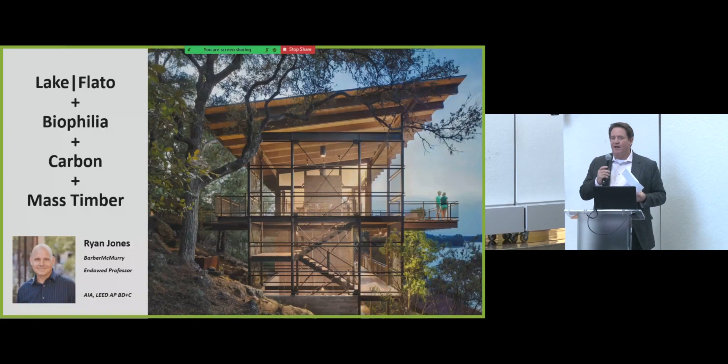Thanks, Jason. Appreciate it. I want to take a moment, and just for the students out there, I want you all to realize how unique it is to have an endowment like the BarberMcMurry endowment within your school. I work all across the country with a lot of different schools, and it's very unique to have an endowment that large that's allowed this school to bring people like me and the amazing other architects that Jason mentioned to the school.

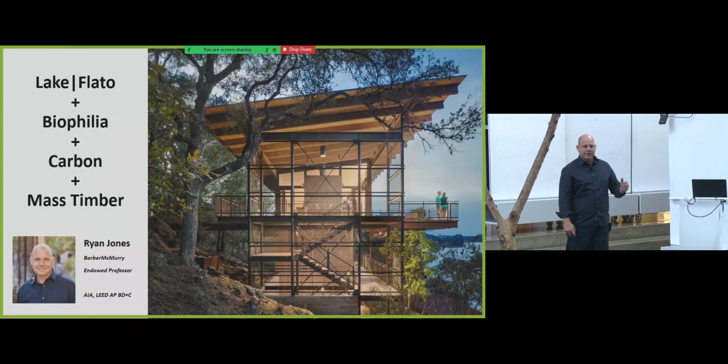As Jason mentioned, I've been with Lake Flato now 18 years, and I lead our higher education studio. Today Jason was asking me, what's the title of your lecture? I got really creative, and I said, well, my title's my agenda.

So what we're going to talk about today is I want to show a lot of work, a lot of imagery, but I want to talk specifically about how we arrive at this work in a very deliberate way, through an integrated design process. So we're going to show some beautiful imagery, talk about biophilia, carbon, and the kind of mass timber direction we're going as an office.

Lake Flato is a firm of 150 people. We have 2 offices, one in Austin, one in San Antonio. We're very Texas-based, but we work all over the country.

We got our start working on ranch houses, and this is 38 years ago, and I think it's always good to remind everybody this is the middle of the postmodernism era, and David and Ted come in, and they're really focused on vernacular architecture that's rooted in place and connected to climate.

We always like to differentiate the fact that we work on ranch houses at the very beginning, because ranch houses to us are differentiated from just normal residential in the fact that they need to be resilient. They need to be out. They're out in the land. They're not urban environments. They're responding to landscape and responding to the breezes and engaging topography, using natural materials of the land.

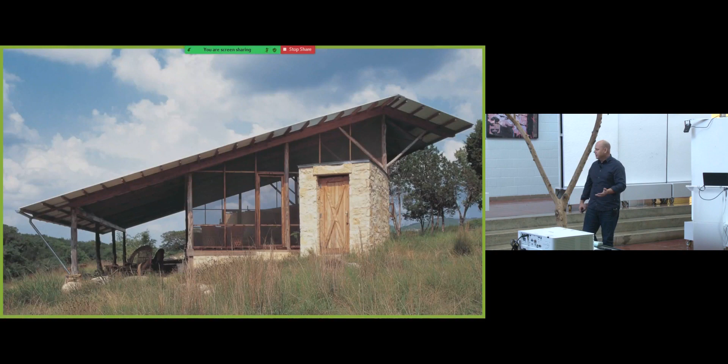Protecting ourselves from the northern breezes, kind of receiving the southern breezes off the creek bed, and those kind of elements, and creating outdoor environments that don't require energy, that just use the natural resources of the climate and the earth to provide shelter.

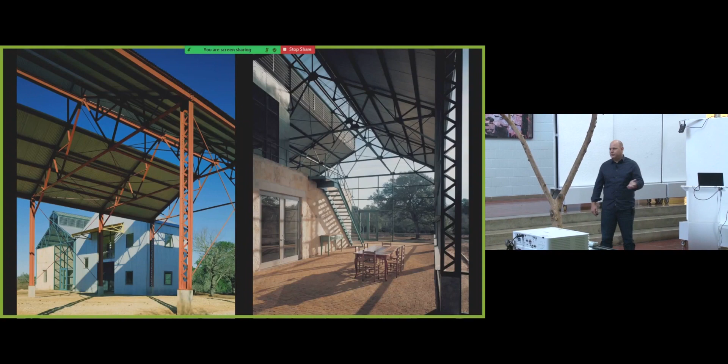And at the same time also, transforming things that are remnants, in this case, an old cement plant into a new residential compound. This is kind of the root of our work, transformation and connectivity to landscape.

I think it's really important to start there because it's really part of our ethos and who we are. As Jason was mentioning, no matter if we're working on residential work or a 250,000 square foot lab building, we share the same values across all of our work. We are highly dedicated to the craftsmanship of architecture, deeply involved in placemaking and the role that has in creating delight and beauty within architecture.

We are very data driven. We use performance as not just something that we hope to attain through our engineers, but we lead through data, the pursuit of data to inform our decision process. And ultimately, at the end of the day, we as architects, our greatest goal is to build community within and play a role in the building of community and culture.

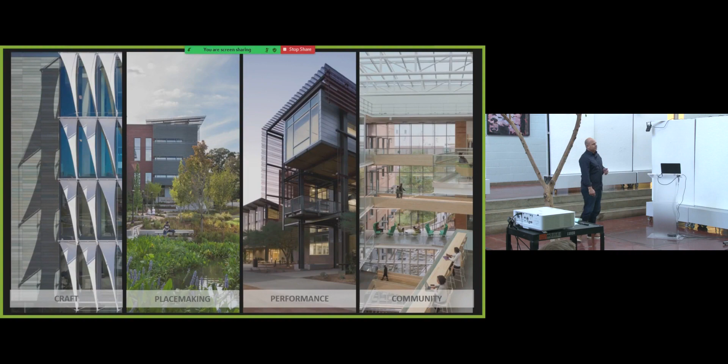So as I mentioned, we're working all over the country now. We're able, because we have such a value system that allows us to focus on the unique attributes of every unique place. What I like to always say is that we as architects travel, but our buildings don't travel. And so our buildings always feel of their place.

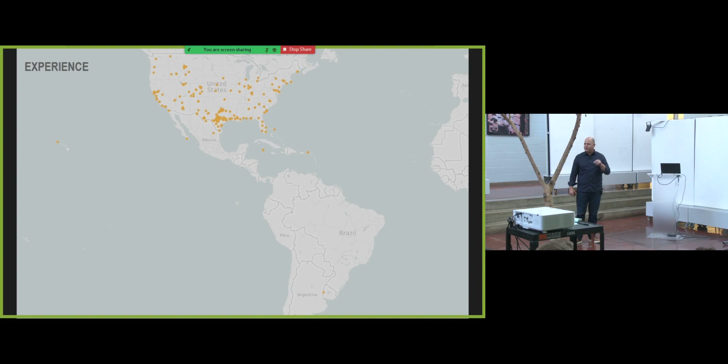And because we aren't necessarily a form-based firm or these kind of things, we really focus deeply on understanding that whenever we're working in Philadelphia, that project is very different than it is in Arizona. And I hope you see some of that today.

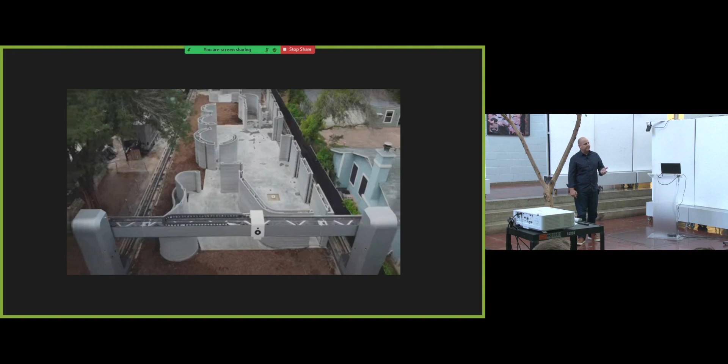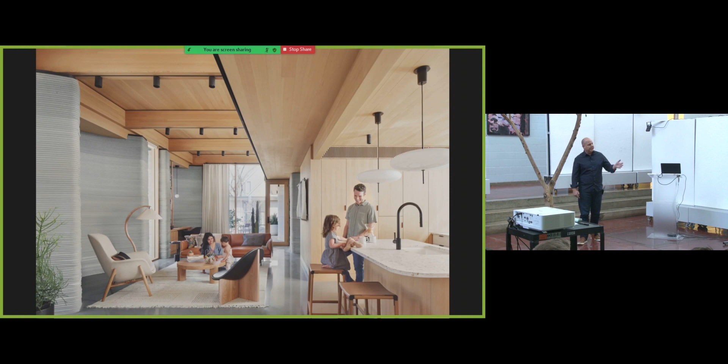So we got our foundation in these ranch houses, but we're also doing very innovative kinds of houses today when we focus on craft, technology as a form of craft. This is a 3D printed house that we just wrapped up last year, really studying a new form of construction and leveraging the system to create texture and a new sense of environment for residential construction.

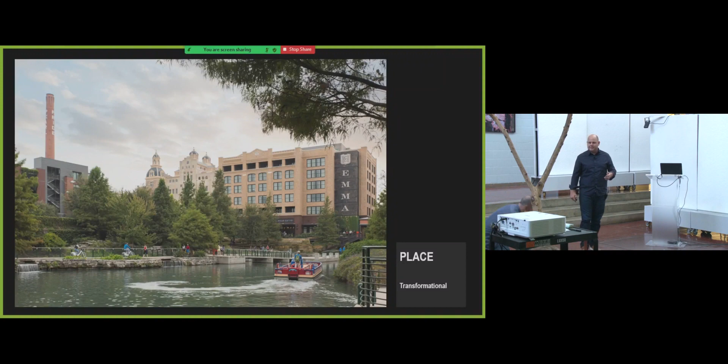Whenever I talk about place, it's also transformation. This was actually my very first project at Lake Flato 18 years ago, where we transformed a storm swale connected to the San Antonio River into a new kind of civic place for the city. Thanks to the endowment, my students were able to visit a couple of these places, including this one, a couple of weeks ago, creating new central places for people to come together.

But place isn't limited to just landscape. It's also a matter of delight, like I talked about earlier. Delight is a little bit different in that the way we talk about it is it's almost a surprise - something you don't expect, but it resonates with you at a different level.

And then we believe that architecture can magnetize space. It can bring people together just through the quality of space that's provided and the complexity of space.

Ultimately it's also unique to its particular place and authentic. We talk a lot about authenticity when it comes to working in different environments because we don't want buildings to feel out of place. In fact, we talk a lot about how our most successful buildings feel inevitable - so deeply rooted in place that once they're built, they almost feel like they've always existed, and you can't imagine what it was like before. I think our most successful buildings achieve that.

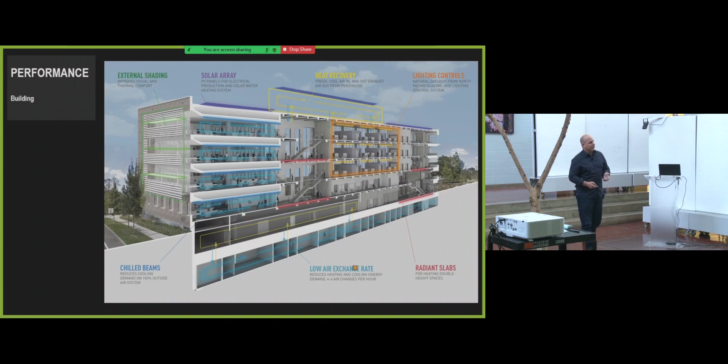As I mentioned, performance - when it comes to building performance, understanding the complexity of systems. I hope part of what you get out of today is understanding the complexity of architecture and the need for an integrated approach, leveraging a lot of different expertise to execute buildings. In this case, a 250,000 square foot lab building required a lot of different systems to achieve 56% energy reduction as a whole, and yet still maintain beauty, still accomplish contextualism and modernism at the same time.

But we don't just focus on energy and carbon, we also focus on human performance and the sense that the type of spaces we provide elevates the human experience and success, frankly, in people's work.

So all this, as we've focused over the last 5-10 years, represents our physical connection to nature, which is called biophilia - I hope you're familiar with that term. If not, I'd suggest you do some research on it. Basically it implies that our genetics and our psychological understanding of space is driven very much, all the way back to the savannah, by our understanding of living in nature and being threatened all the time by nature.

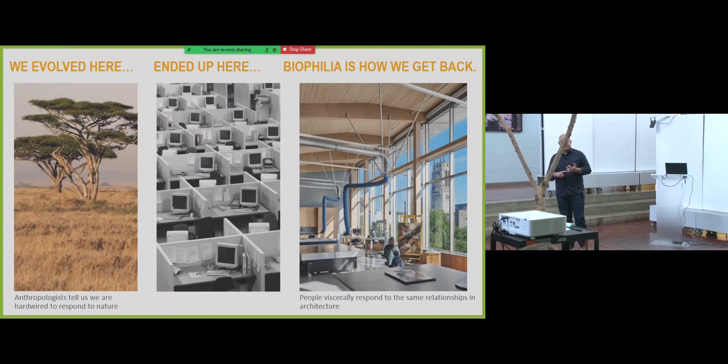But it also creates a strong connection to our natural environment. Over time, as we've built architecture and other things, we've kind of landed in a place of cubicles, especially several years ago, where we're stuck in these really awful, inhumane environments. Biophilia in our lens is really a way of getting back to what feels more natural, what makes us happy, what makes us most productive, and just connected to nature in general. That's a huge part of our ethos as an office.

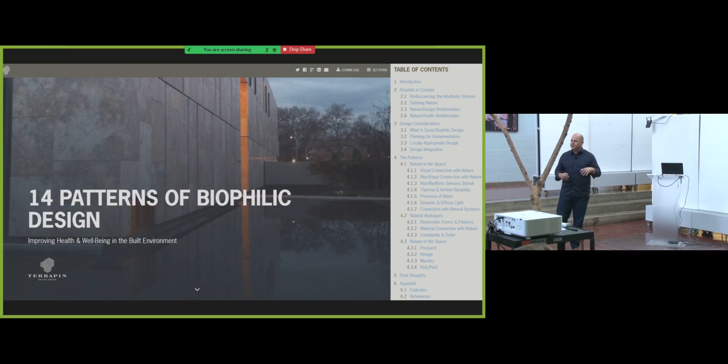The very first step to understanding biophilia is to go and reference the 14 patterns of biophilic design that Terrapin Bright Green has done for all of us. It's a great resource - if you're not familiar with it, you should go read this. This to me is mandatory reading for everybody working in architecture. It basically talks about all the different forms and different ways that design can connect us to nature.

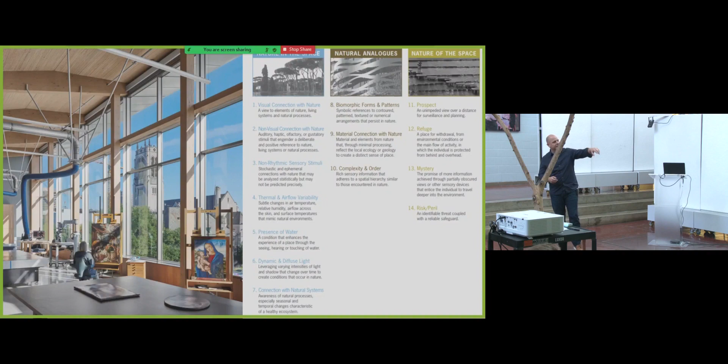We always look through our projects through the lens of nature in the space and natural analogs. I don't have time to give a whole lecture on this, but I'd encourage you to go read about it.

It's all about taking spaces like this that we've been stuck with over several years. As a higher ed person, I can't tell you how many classrooms I go into across the country that look exactly like this. We look for opportunities to reconnect them, and even though this isn't an amazingly expensive space, you can tell the connectivity it brings back to nature as a whole.

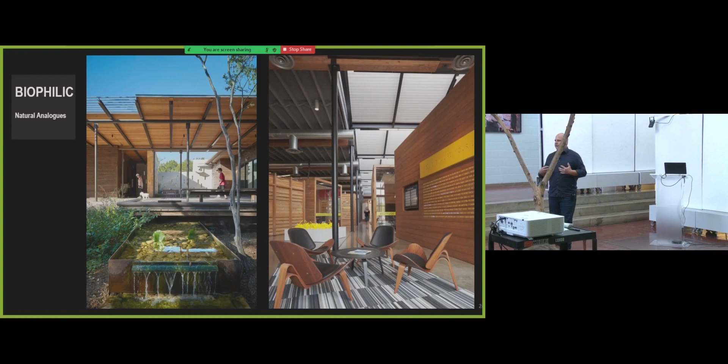There's also using natural materials, water, engaging porches that connect to the landscape, daylight, all the stuff your professors talk about over the years, the way it shapes space. We talk about buildings being shaped by light and by landscape, meaning it's a major driver of where we put program, how we shape roofs, and everything. You can feel that in all of our work.

At every level, I think that comes from realizing—and a professor once told me this—that the older I get, the more I realize how little I know. The point is you have to lean on the expertise of other people to achieve really high aspirations for your architecture.

So we focus very heavily on bringing together diverse groups of people very early on in the process, including our clients, our engineers, landscape architects. Some of our best ideas come from people outside of the project, other faculty, and we bring them together to talk about the project in a cohesive manner, very early on.

We do that through the lens of talking about things like ecology and water, energy and air, light, materiality, resiliency, equity, diversity, and inclusion. We run charrettes geared around these topics and think about the project through the lens of those issues.

There's an extensive process we go through in documenting this, but the point is that we're always looking to gather information—gather opinions, gather data, gather different perspectives, and in some cases even history.

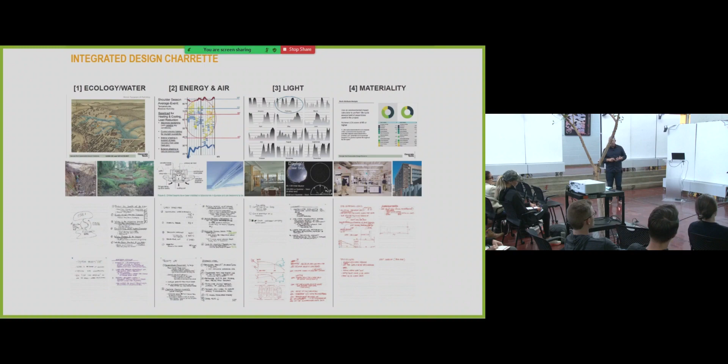Through this integrated process, my students have seen that we try to define what the goals and aspirations for the project are at the very beginning. We do that through what we call SMART goals—goals that are specific, measurable, aspirational, attainable, relevant, and timely.

The point is they're not just 'we want to build a beautiful building'—they're very specific about what we're trying to accomplish and how we define success. Because the clarity of your goals really matters, and you need that clarity in order to build consensus and belief in your project amongst a large group of constituents.

Most of the time in your career, unless you're working in residential, you're not dealing with just one person—you're trying to keep 20, 30, 100 people happy, and it's very difficult. The way you do that is by developing buy-in through a very clear, aspirational understanding of what you're trying to accomplish.

Then on top of that, you keep track of those goals throughout the lifetime of the project so they don't just die at conceptual design. You go back and check on them through SD, DD, CDs, all the way through. You always return to these goals established early on, which is why this process is key—because your ability to impact your project fades with every day that goes by.

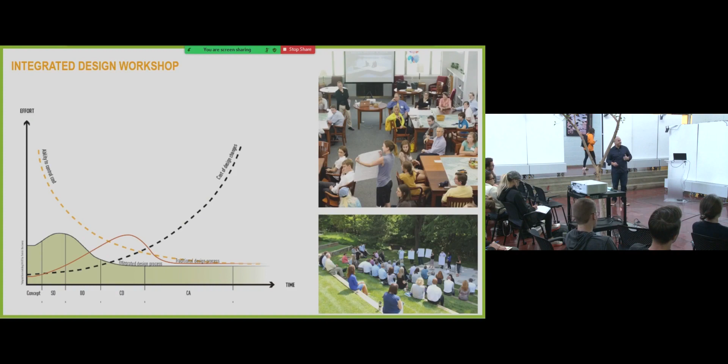So I want to encourage you to be very aware of the need for collaboration and an integrated approach in architecture as you move into the profession. I think it's our focus on this deeply integrated design process that integrates both beauty, what we call the art and science of architecture, at the very first stages that makes us one of the more successful, sustainable design firms in the country, with 14 AIA Top 10 awards, which we consider the highest honor within our profession. And we've managed to do that across a lot of different sectors.

So I thought I'd quickly go over a project that summarizes this impact of integrated design. It's Confluence Park, an outdoor pavilion we designed at the confluence of two waterways in San Antonio. The original design was this conceptual idea of just a shell. It's very form-based, interesting, it's been done a hundred times, but it's interesting, a fun space to be under.

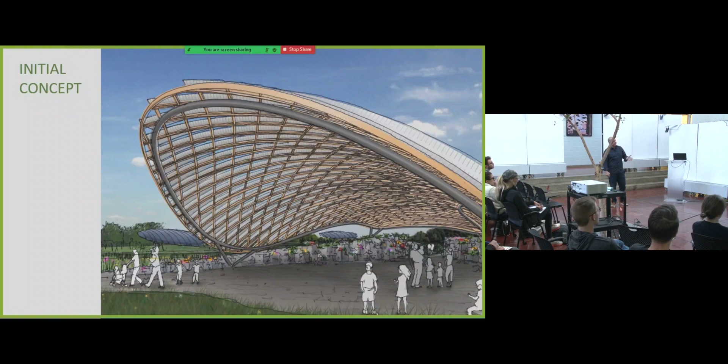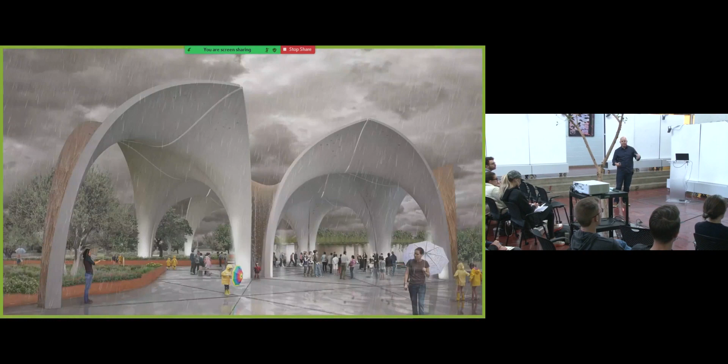What we found is, as we started thinking about it with our artists and engineers, what we're really trying to do is protect people from water. We're also trying to collect water, and understand the shape of that and how it could form a building that would function in both ways at the same time, being a physical representation of the collection and movement of water.

So we worked with artists and structural engineers to understand how we would fabricate what we call the petals to accomplish this. Each one of these petals is the exact same, but they're distributed in a way that creates an interesting biophilic form that's educational about the waterway, constantly collecting water and so on.

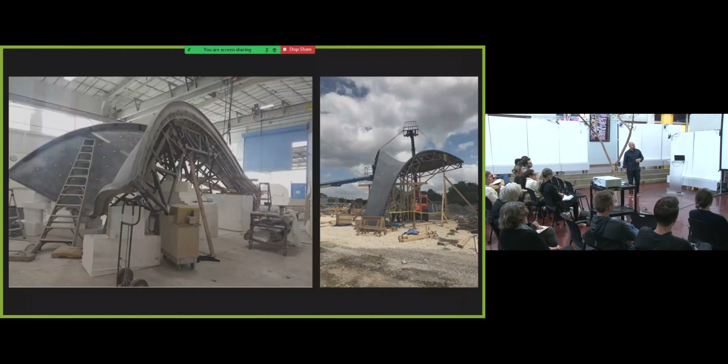Even though it's shaped like petals and runs along the waterway, it's really also a ceremonial destination. That's only accomplished if you have a good technical understanding of concrete and form-making, and all the other skill sets required to execute a project of this order of magnitude, as well as constructability.

These were all cast from a mold that was fabricated in Austin. This is actually a temporary setup, a mock-up, and they were cast in Austin, shipped to San Antonio, and placed in place, all hung. It was all erected in just a couple of days.

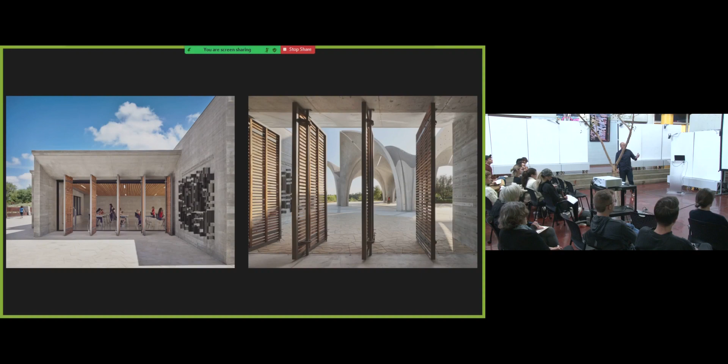So some of it's just beautiful imagery, and we'll share some of that today. But almost all of our work at EcoCon, our ecological conservation studio, is really focused on education. So all these moments are opportunities to be demonstrative and celebrate the unique role architecture can play in connecting us to nature.

So, Lake Flato. I want to shift a little bit and talk about where we are as a society in general. I have a friend at Eskew Dumez Ripple EDR out of New Orleans, Z Smith, a really amazing individual. He and I always run into each other at conferences, and he gives this presentation where his start is basically the end of world discussion, that the world is ending.

It's burning down, we're dealing with severe climate change, severe global warming, and he's right. It's very end-of-days, because it's meant to scare you, and it's true—that is all going on, and it's something we have to deal with, and we have a responsibility in this room to deal with that as we move forward.

The way we talk about it is that there's a reality about population growth and expansion within our world, where basically we're building 230 million square feet of building every month for the next 40 years. That's the equivalent of basically building Manhattan every month for the next 40 years. It's absurd. Think about that. That's crazy to think about.

And so that has a huge impact on the way we think about our impact in terms of construction and architects, and the fact that 39% of CO2 emissions come from buildings. So, 40%. It's huge. It's not, I drive an electric car. I love my Tesla, it's great, but that's not where the impact's coming from.

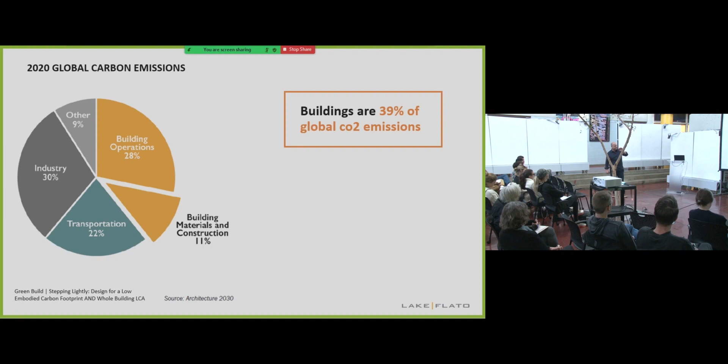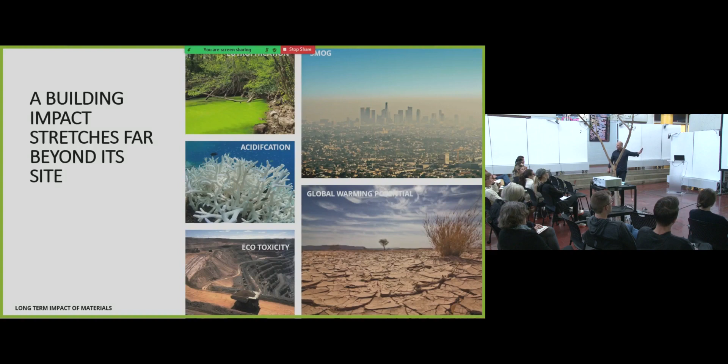We're having the impact elsewhere in our 40%, and it's not just in carbon. It's also through all these other kinds of impacts that are beyond the site—that's a whole other presentation I could give just on the impacts we're having beyond just carbon and global warming potential.

So I always feel like it's important to start with what's causing global warming. Greenhouse gases are basically creating a blanket above the Earth's crust. Normal solar radiation comes down, bounces off, and goes back into the atmosphere. That's the way it's meant to work. That's the way Earth was designed to work.

And now these greenhouse gases are basically creating a blanket, which is keeping that solar radiation from moving back up into the atmosphere. It's trapped, and that's what's causing global warming. So that's just real quick, but it's really important.

So there's two pieces we want to talk about. There are two elements of global warming potential: embodied carbon and operational carbon. We're going to focus more on embodied carbon today. Embodied carbon is basically the amount of energy and CO2 it takes to extract, manufacture, construct, and even dispose of down the line any material we build with—whether it's concrete, gyp wall, or mass timber, which we'll talk about today as well.

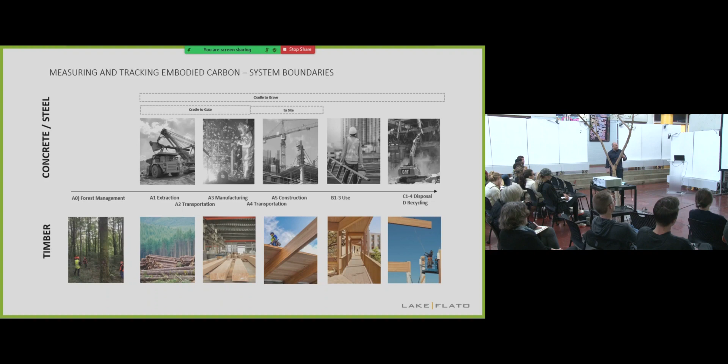So in the embodied carbon pie of a project, structure makes up 56% of the embodied carbon within a building. That's really important to understand. So the biggest impact we can have on the embodied carbon of a building is by being very critical of our structural systems in some capacity. And of course there are other impacts to think about as well—everything has an impact—but structure has the biggest impact.

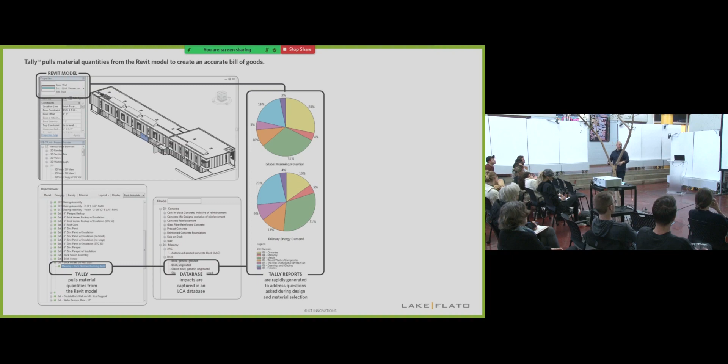To assess embodied carbon, we use a program called Tally. KieranTimberlake actually created this several years ago and shared it with the larger community. It's got its quirks, but in general it does a great job of assessing things like the global warming potential of different siding materials.

Once again, we think about data informing design decisions, and starting to think about, well, if we're going to clad a building in granite, it's going to have a huge impact that we're going to have to make up somewhere else or make a better decision. Or we're going to need to find a more efficient way of building with granite in this case.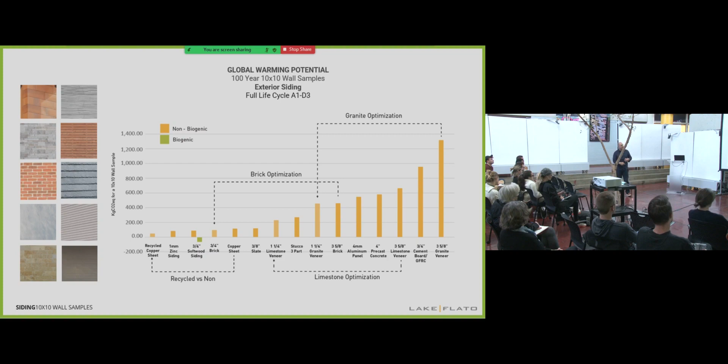My point in saying all this is that we have to actively seek out data to inform our decisions. A lot of this is intuitive, but data is a major driver in our design process as we develop decisions about even things like insulation. Just FYI, XPS insulation - you'll get into this later in the profession - is really bad stuff. You should try to avoid it as much as possible.

The other thing is that even within decisions like using concrete and steel, some of these materials have huge ranges. Some can be fabricated really sustainably with very low global warming potential, and the same product can be fabricated in a really poor way and have a really high global warming potential. As we transition to talking about steel and mass timber, steel can actually be fabricated in a way that's fairly sustainable, but the problem is it also has a huge range. It can be fabricated in China by an unsupervised plant that's then shipped to the U.S. in really poor ways, and have a really huge impact. So just be aware that some things are more controlled and have more oversight than others.

I think what that all comes down to is really maybe focusing more on regional materiality as we think about this.

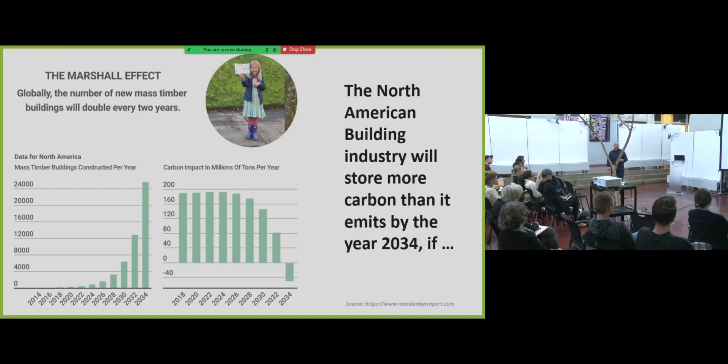So what is mass timber? Some of y'all may not even know what mass timber is. There's light timber, or stick frame, which is like 2x4s - go to Home Depot and buy your 2x4, that kind of thing. That's not what we're talking about today. Heavy timber is large logs of lumber, old cabins, that kind of stuff. But then you have mass timber, which is basically glue-lam strategies - smaller pieces of wood glued together to create larger structural members.

The reason the smaller piece is really important is because it allows for forests to be more sustainably harvested, because you're able to harvest much smaller trees to fabricate much larger elements, which is crucial. A company like Nordic out of the Northeast in Canada harvests 6-8 inch trees to fabricate all their glue-lams, columns, and beams, versus having to harvest a huge 30-40 inch live oak. We're harvesting much smaller elements that make it much easier to sustainably manage forests.

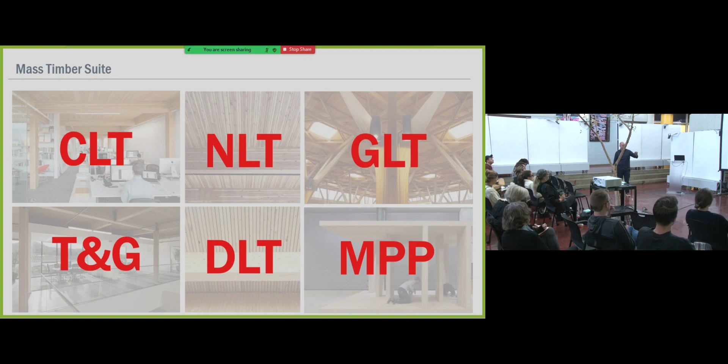So smaller members are pressed in this way. This is a CLT panel coming out, but there are different products: cross-laminated timber, nail-laminated timber, dowel-laminated timber. Those are the primary elements out in the market. We'll talk about this specifically in a little while. They're also coming out with mass plywood solutions. We're doing a residential complex in the Northwest out of mass plywood, but there's only really one manufacturer doing that right now, and they all have different aesthetics. Basically these are the two main products you see in the market: dowel laminated timber and cross laminated timber. The whole idea is they're just 2x6s either laid on top and doweled together, or cross laminated.

The great thing about cross laminated timber is that it acts basically as a two-way concrete slab structurally. I'm sure there's someone more experienced in this at school than I am, but the main point is that it acts as a two-way slab, which allows it to cantilever in different directions than dowel laminated timber does. We're actually leveraging that capability on a project for A&M right now.

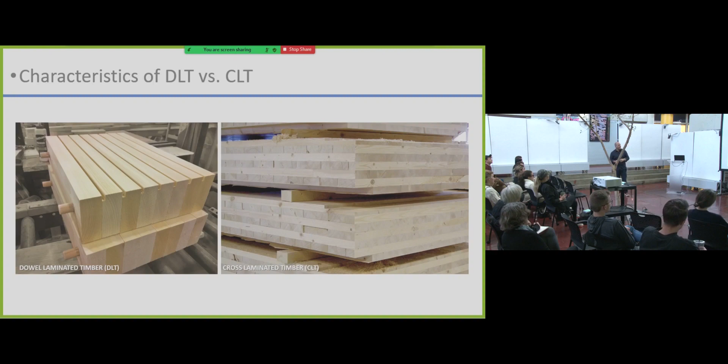If you haven't been to the Kendeda building at Georgia Tech, I highly suggest you go. There's actually a lot of great work on Georgia Tech's campus, between Miller Hull, BCJ, Lake Flato, and EDR — some great architecture on the Georgia Tech campus.

One of the things they did that was unique to this NLT, nail laminated timber, approach is they were actually able to — I love the story, Brian from Miller Hull loves to tell it — get local tradesmen to fabricate the NLT on site. These are people that didn't have jobs before this was done. So they were able to create a more community-focused job supply chain, if you will, to create the NLT for the building, which is a great story.

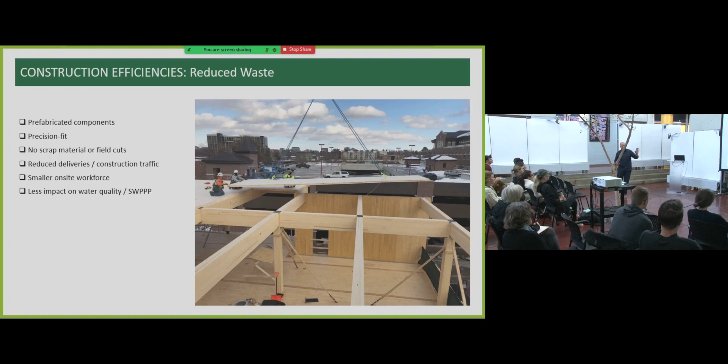So it's not terribly complicated. I think the other piece that's really beautiful about mass timber is that it comes together very seamlessly. There's very little waste, it's very precise, and it's got a smaller on-site workforce. What's great about this is, I'll talk about that in a minute — you end up with these very clean spans of mass timber.

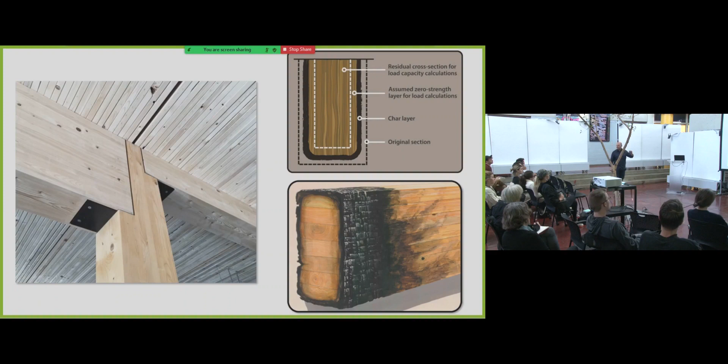Well, it's wood, so it's got to burn, right? So everybody's worried that it's going to fall down because it's burned. What people need to understand is that mass timber has what they call a char layer, which means the amount of fire rating needed for mass timber is determined by how thick that char layer has to be, which allows you to meet all the fire ratings of code and compliance. So it's actually very likely that a steel building is more likely to fail than a mass timber building in certain circumstances, and that's really key to understand.

As mass timber has grown, I think this is really important to y'all — we're seeing plants pop up in Alabama and Arkansas, and they'll be in Georgia before you know it, all over the country. Because basically what's happened is we're now able to use southern yellow pine as a species for mass timber, which six years ago wasn't really viable. So you're starting to see an interest in the growth of this kind of product in different regions, and every manufacturer has their own unique take on things.

What we found is that the thing to focus on when it comes to mass timber is how it's sourced and where it comes from. I think the way it's harvested really matters — it can't just be harvested in an unsustainable way, in order to accomplish the goals we have for carbon neutrality.

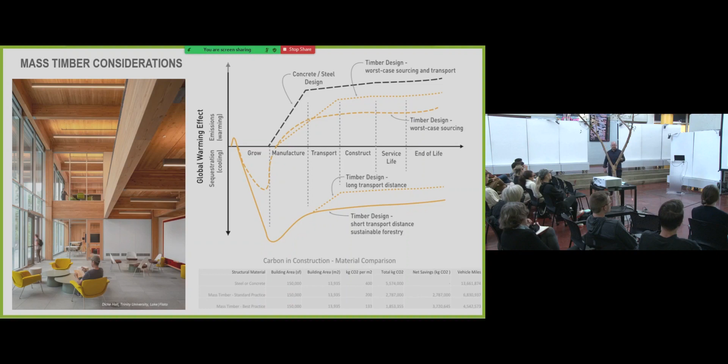I want you to take away from this chart on the right that the global warming effect is greatly reduced whenever it's grown and harvested in a sustainable manner. And if it's not grown and harvested in a sustainable manner, it almost doesn't have any impact by comparison to steel, and that matters. So when you're thinking about specs and being critical of your process, you need to be aware of that. But most of the great manufacturers in North America have that kind of well done.

So great, now we know what mass timber is. I have two more things to share, and I have two projects. If we have time for both, great; if not, that's fine too. I want to start with Trinity University, a project we just completed. We just opened it three weeks ago, for Trinity University in San Antonio, Texas.

O'Neil Ford was kind of the father of architectural modernism in Texas. In fact, David Lake and Ted Flato both worked for O'Neil before they started Lake Flato Architects. Trinity was originally master planned to be like the Princeton of the South, meant to be a very formal campus, which is a very northeastern kind of attitude about coming down to Texas and building a campus. O'Neil pushed them away from that and said no, this needs to be a whole new place of learning, a whole new way of

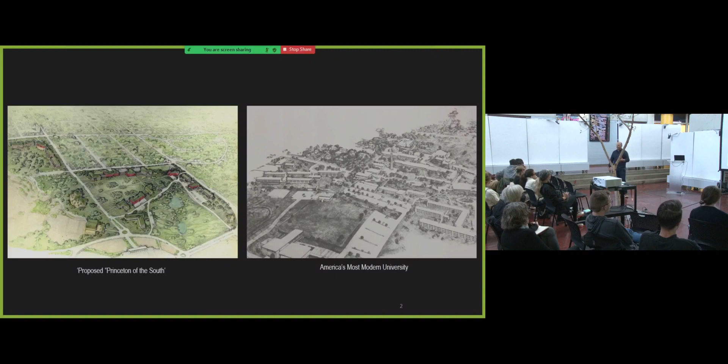creativity and experimentation and so on. Because of his deep roots in understanding nature, landscape, and craft, he really pushed the campus more toward these east-west bars that were directed toward responding to topography. It was an old quarry, so it lines the edge of an old quarry, and really defined outdoor rooms in a very informal way versus a very formal quad way. It created a whole new ethos of what a campus can be in Texas.

O'Neill was also very interested in structural innovation, and all the buildings in the very early days, him and his engineers invented this thing called the lift slab system. It was basically just slabs poured on the ground and lifted up into place. At the time, it was very, very innovative. So there's this heritage of structural ingenuity on the campus that really made mass timber an interesting topic for this campus.

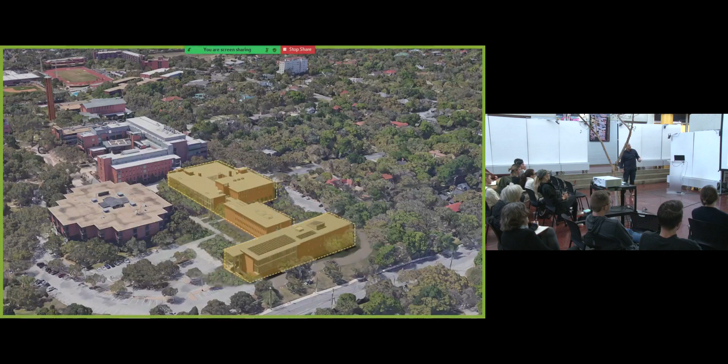We were tasked with renovating two existing O'Neill Ford buildings and adding a new building on the northern end of campus, at the bottom of the page. We also had to shoehorn in 10 different departments, 130,000 square feet, into these three structures. Programmatically, it was very interesting to find ways of leveraging and maximizing the space that already existed in the renovation, while also adding a new building and giving everybody a sense of identity within this complex.

But the new building here on the northern edge was placed to define the edge of campus. It was also placed to terminate a long axis, the approach from the central quad of campus on the right, while also creating an identity of a district around a courtyard. So this simple east-west bar managed to accomplish all these different landscape gestures within the project.

We are also pursuing Texas Historic Commission tax credits, which meant that in our renovation, basically 10% of the budget of the project was coming from the Historic Commission's pocket. But that came with a lot of restrictions in terms of what we could do architecturally. They wanted it to fit into the campus, to the point that the new building couldn't be taller than the building immediately adjacent.

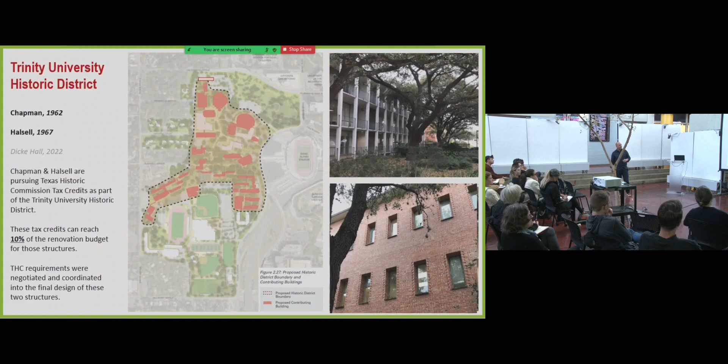So we worked a lot with them to really define the character of the building, to fit in and define a district within the northern edge of campus. It was set up as an east-west bar focused on a central spine running down the middle, which we call the academic spine. All the academic programs are on the east side, because they're the more public programs, part of the front door on all three levels, considered part of the front door to not only the community but also into the campus. More of the student-centric departmental spaces were on the west side along the courtyard, which felt more focused on the identity of the courtyard and created a sense of cohesion amongst the departments.

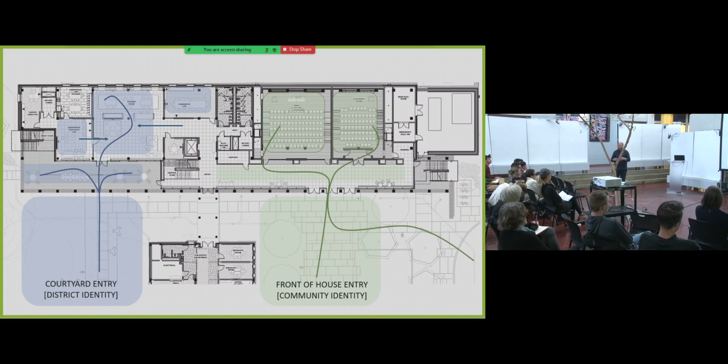So this skinny east-west oriented bar is doing mass timber, and I think one thing we accomplished is a 55% reduction in embodied carbon. We're sequestering enough carbon that it's basically the equivalent of 830 acres of forest. So just in the one decision about mass timber, we were automatically able to accomplish some pretty amazing metrics.

It's also the first 100% mass timber vertical construction in Texas, which means we were able to accomplish all of our shear walls, all of our core walls, everything in mass timber. There's a lot of buildings out there that use concrete, CMU block, or steel for their lateral bracing and cores.

And creating student-centric spaces that were adjacent to the courtyard. The other thing about the east-west orientation of the bar is that it's set up to maximize solar protection.

We are accomplishing 78% of our energy demand through our PV array. But the more important thing, the passive design strategy, is that we were able to put all of the transient spaces—the hallways, the porches, the zones that could have a much wider spectrum of temperature range—on the south elevation, where we had less control of heat gain, and place all the more regularly occupied spaces that have tighter temperature zones on the north side of the building. That one move allowed us to basically build in a buffer between solar heat gain, which is our primary problem in Texas, and the more controlled spaces on the north.

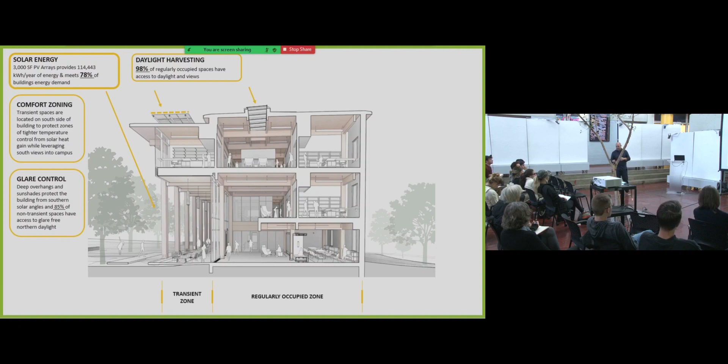In the majority of Lake Flato projects, I haven't seen one that was less than 90%. Almost all of our projects have 95% or more—in this case 98%—of our regularly occupied spaces with access to view and daylight. Very rarely will you find rooms in Lake Flato projects that don't have a window or daylight. It's not common, it's against our ethos. So whenever we do our early planning strategies on buildings, it's a huge part of what we focus on.

In order to maximize the potential of the mass timber, we chose to go to a raised floor system for our air conditioning and heating demands of the project. And what's really—

We made all these decisions a year before COVID hit, and I think it was one of the lessons we learned, because in an underfloor system it's basically a pressurized plenum underneath the floor that pushes air up from below as opposed to pushing air down. Since hot air wants to rise, the air moves naturally up and then is ventilated off the ceiling. Before COVID that wasn't a big deal, but after COVID, the idea of moving pollutants up out of the zone versus pushing them down into the zone became a huge part of the strategy for creating healthy interior environments.

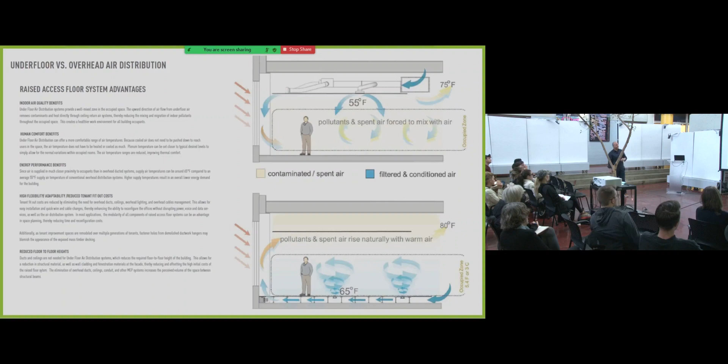So that was really, really important. It's also typically about 10 to 11% more efficient than a normal air conditioning system. The other thing is it allows us to clean the ceilings—on the images on the right, much cleaner systems because we don't have a lot of ductwork. It also allows us to put all of our conduit and AV needs below in this plenum space, which allows for long-term adaptability, which is really important.

The biggest drawback of a raised floor system is that it's noisy—it's not as solid as a concrete slab, for instance, and that bothers some people and some clients. But it's a very effective way of getting a very clean, organized structure up above.

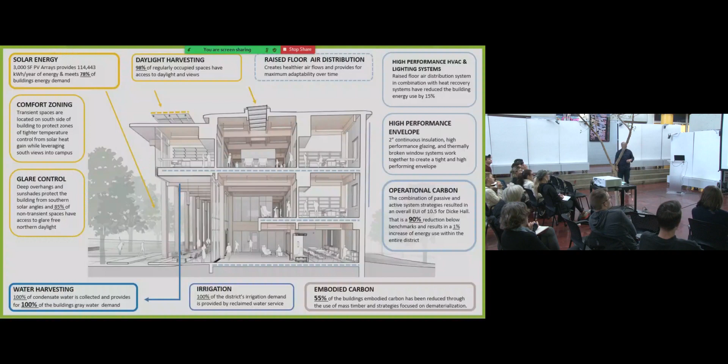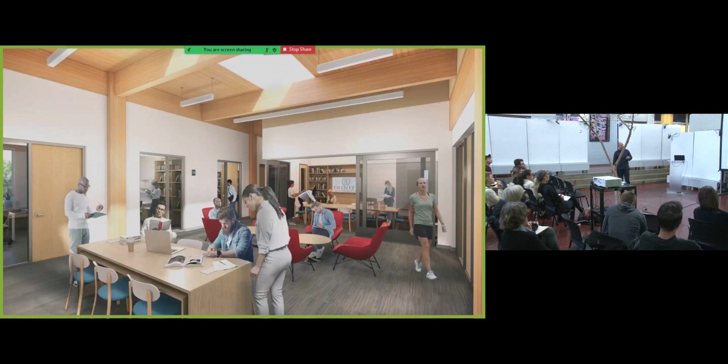And then we got water stories going on as well. So like I said, we just wrapped this up a couple weeks ago. In fact, our marketing department took some photographs—we haven't had it professionally photographed yet, but here's some imagery of the completed project.

One of the challenges with mass timber is the species. Most mass timber comes in Doug fir and spruce pine fir—those are your two most predominant species. Now yellow pine is becoming more predominant. Matching to Doug fir with all the other wood finishes in a building is actually very challenging, so be aware that matching wood species can be difficult.

In this project, we chose to match everything to Doug fir as much as possible. For some of the other spaces in the room, we used western hemlock, Doug fir, and red oak flooring. That was the species mix that got us to these warm, pinkish hues you get with Douglas fir.

At the end of our project, we did a carbon analysis comparing steel to mass timber. We had our structural engineer go back and give us a design for the building as if it had been steel, so we knew exactly what the members would be. That let us get an apples-to-apples comparison and do a deep dive analysis of the two systems. What we found is that our global warming impact went down about 50%.

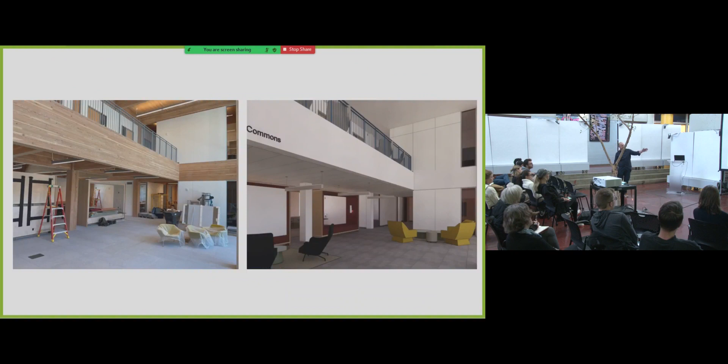So it's basically the comparison of these two images, right? That 3.3% represents the savings between the image on the right and the image on the left. I think what we're talking less about is it being more expensive, and more about the level of expectation of your client. If your client expects a quality product, then in our opinion there's no cost differential, because we're not having to apply all kinds of new materials to get to these finishes that we already have with the structure. That's the real point we make whenever we have these dialogues. So anyway, just more comparisons.

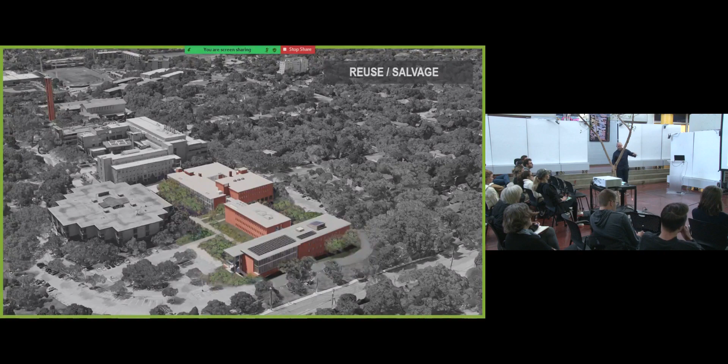The other piece is that we're salvaging 2 buildings as well. I did want to mention that in terms of embodied carbon in particular, we're keeping that by renovating existing structures, which I think is going to be a huge part of where the profession needs to go for the next 50 years, because we're going to have a ton of mid-century modernist, and brutalist, frankly, architecture that is going to need work and have its life extended in the immediate future.

But ultimately, the end game is to basically salvage buildings and have them be really highly efficient operationally, energy-wise. That can be difficult - sometimes with older buildings, it's really difficult to get them to be really efficient structures.

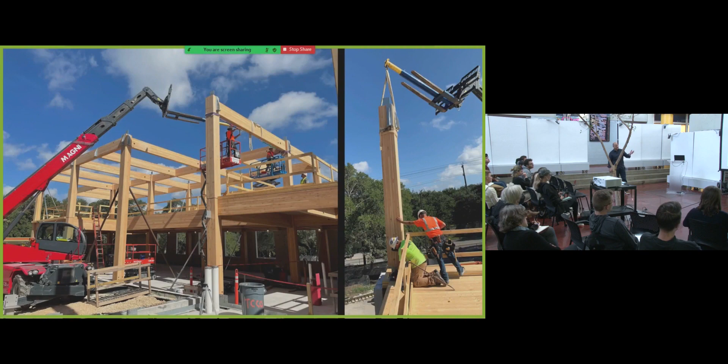So I thought I'd share some construction photos just to understand that this whole building was erected in, I think, 2 months, maybe 3 months, by a team of 7 people. It's just very few people working on it - it's really remarkable to see them.

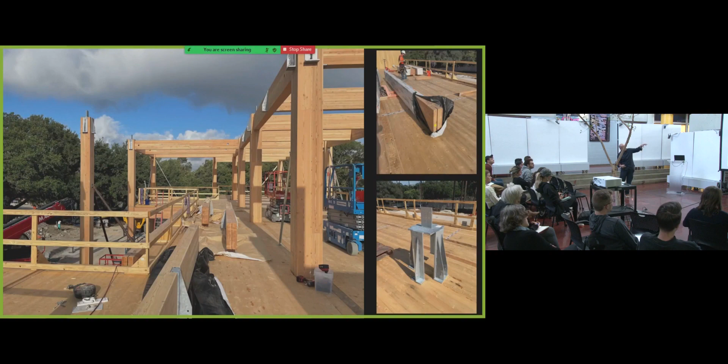They all get delivered on site, all CNC routed. What you're seeing here, the brackets on top of this column - you can see on that beam on the top right how they've routed out the connection joint from the mass timber element, and it just slips down on top and gets screwed in with two long screws, and it's done. It's really remarkable to see them erect these things.

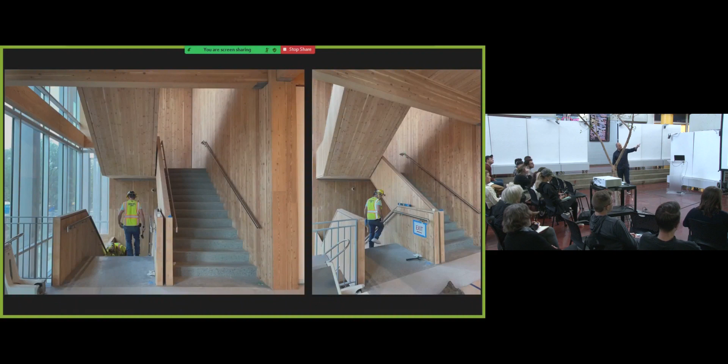These are the shear walls that were installed that I mentioned earlier, which are very unique for mass timber in Texas in particular, where we just exposed the CLT shear walls on the interior of the space, and created enclosures for the stair, which is all CLT as well, in terms of the new stairs.

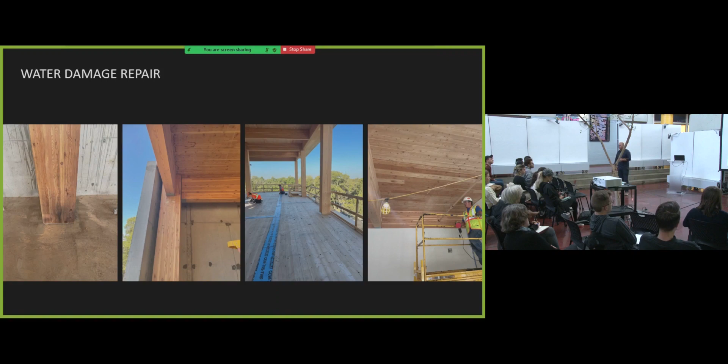You do get water damage during construction - it's normal. Wood's okay being wet as long as it doesn't stay wet. As long as it dries out, it's totally fine. I think that's the piece people always worry about - oh, it's going to get wet. Well, as long as it dries out, it's not a big deal. And what we find is that this kind of staining you get through construction before it's enclosed all just sands right off. It's really remarkable how easy it is.

No, it's not easy. It still takes work - somebody's out there doing it, don't get me wrong - but they sand off and look beautiful whenever they're done.

The same with penetrations, like the same penetration on the left that we had to cover up - the repairability of mass timber is really unique. We deal with concrete all the time, and it's very challenging to get repairs in concrete to feel as clean and beautiful as this.

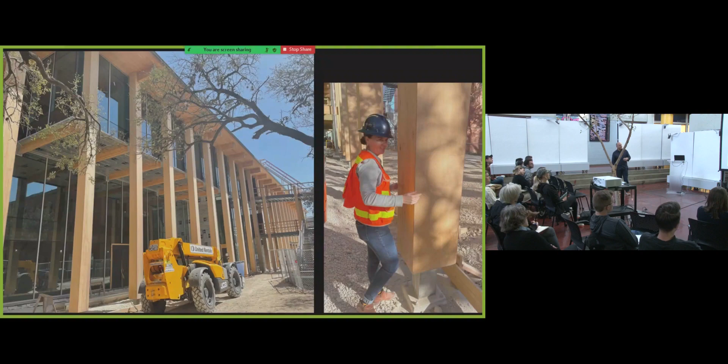Jason, Carl, do we have time for one more, or are we good? Yeah, okay. Let me just breeze through this real quick for like 5 minutes, just show some imagery and not talk too much.

So we're working on a data science building at University of Pennsylvania up in Philadelphia. Their whole thing is it's a computer science building, but they wanted to reconnect people back to nature - they wanted to be computer science but also biophilic at the same time. And they also wanted to be a destination that kind of linked.

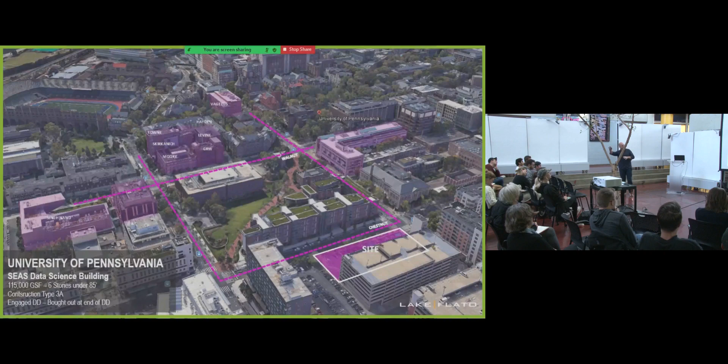This is the great Weiss/Manfredi building on the left, the Nano building - that's their main hub of engineering. Since they were off the main axis of engineering, they wanted to be a destination and wanted to be unique.

They had this site next to a garage that we had to come in. So what we did is we built a 6-story structure, the first mass timber building in downtown Philadelphia. It's going to be 6 stories, which actually maxes out the code compliance of exposed mass timber - there's some nuance in there, but at 85 feet. So it's a very big deal for us to build a building this scale.

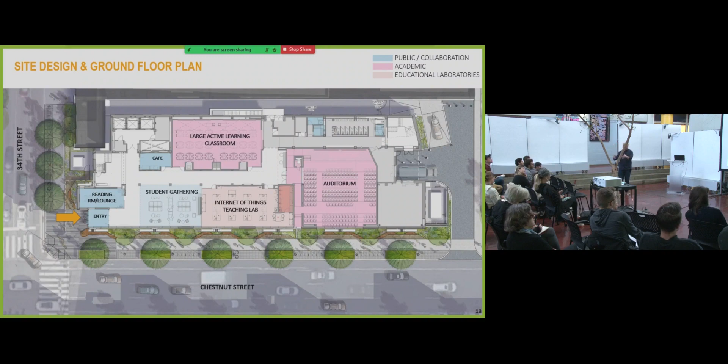The ground floor really wanted to be a welcoming space, really a front door that also communicated the diversity of programs in the building. As you come in, you're immediately greeted by not only mass timber, volume and daylight, but also views out into the landscape, the community, and the street.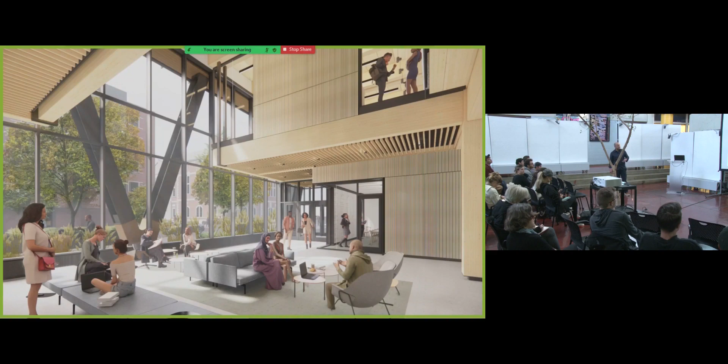It's organized so that the academic programs are down low, the research programs are up high above, showcasing all the stuff. Within the research, there are also collaboration zones that really drove the facade and composition. So we end up with this organization of the facade in response to interior program, with these breakout spaces along the perimeter.

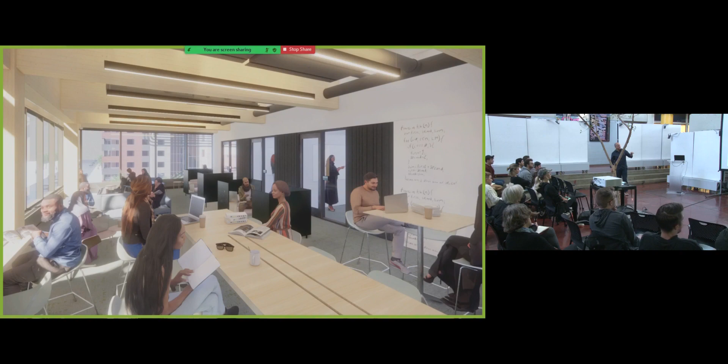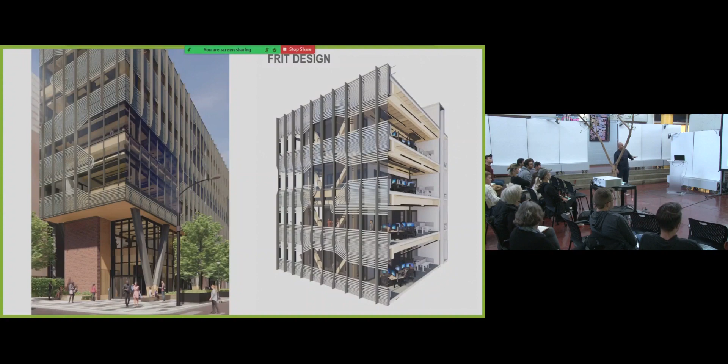The unique thing - we had this great vision for huge sunshades and stuff, and it got value-engineered out, of course, so we pivoted to another strategy that dealt with frit as one of the main solar protection strategies. The frit was really meant to respond to different things.

One, like the natural graining of wood, leaves, the circuitry of electrical engineering. It really looked for ways to take this aesthetic and make it performative, because the frit actually reduces the solar heat gain impact and the glare of the building.

It's actually a dark colored frit. We were able to work with the engineers, the artist, as well as our design team to create these layers of how the organization of the frit would occur in response to program, daylight management, the mullion system, the window system, and all the different light levels required - because some areas wanted deeper penetrating light, some wanted very short, muted light, and responding to all those is really the criteria we worked within our script to define.

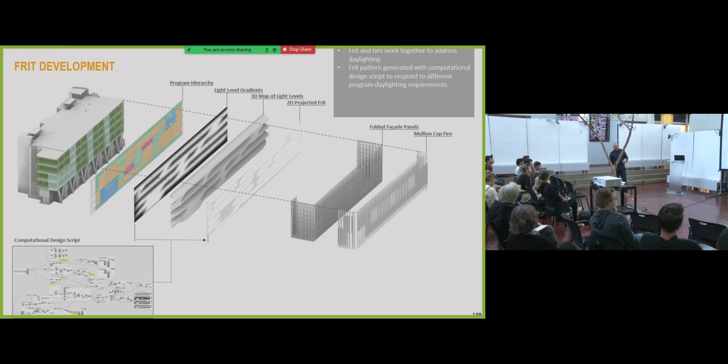This is the frit pattern, which is the mock-up that was just completed a couple months ago, as it works across the facade.

One of the reasons they chose to go to mass timber wasn't only because of the warmth and the biophilic nature of it, but also because they're in downtown Philadelphia. It needed to go quick, go quiet, and not impact traffic a lot. Versus concrete, you're going much quicker, and you get out of the rest of the community's way. It's a big deal, especially when you're building right next to a neighborhood, and you have a construction process that's significantly quieter. Think about how many fewer complaints you have as a university dealing with that.

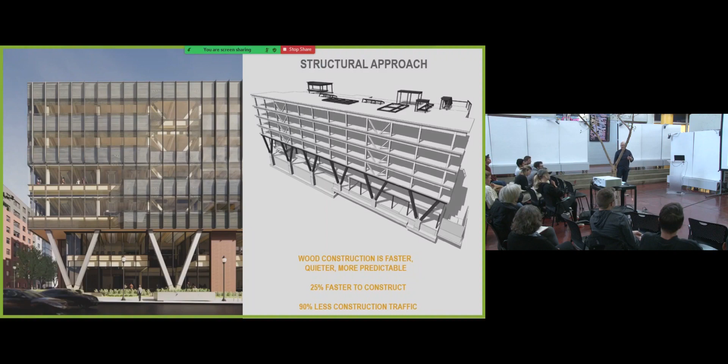So that matters. We actually saw a 70% reduction at Penn on our carbon. We're doing an exposed system of mechanical systems at Penn. It's a lot more challenging, but we've had to work really hard to get all that organized, and there's a way to do it.

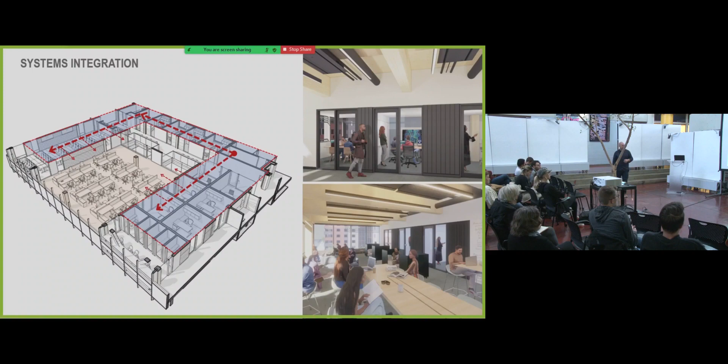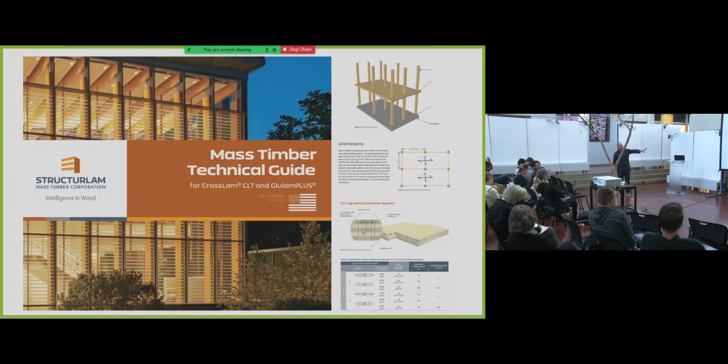So last thing I'll leave you with: if you're interested in mass timber and not familiar with Structurlam's Mass Timber Technical Guide, that's a great place to start. It has a lot of great information about grids, sizing, and all kinds of things. The other one is Woodworks. Woodworks has a lot of really great white papers on mass timber covering everything from protection of mass timber during construction to insurance requirements for owners. A very wide spectrum.

As my studio knows, we talk a lot about architecture, beauty, imagery, and all these amazing things, but I also want you to really look at successful people in our profession. So I always like to bring up some books to read to help you grow as an individual. Seven Habits of Highly Effective People is a great starter point, if you haven't read that. Good to Great is a Bible everybody should read if you want to go from good to great. Start with Why by Simon Sinek is a great way of focusing your goals and what you're trying to accomplish. And Think and Grow Rich—it's not about making money, that's an awful title for that book. It's about living your life with intention and being intentional about what you want to do with your day and where you want that day to take you. So don't misunderstand the title, it doesn't tell the full story.

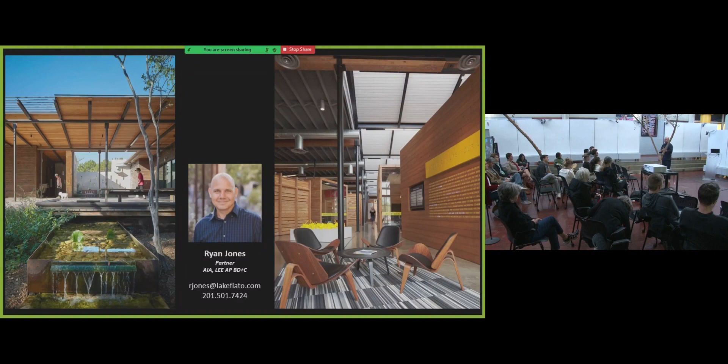So basically, if we can make better decisions about passive design strategies, maximize the impact of daylight harvesting, protect ourselves from, in our case, intense western solar heat gain—if we can set up what I call passive programming, which is placing programs in places that create

stronger synergy between the climate and the program. So for instance, in our case, we were placing all the transient spaces on the west elevation to buffer heat gain. I do a lot of STEM buildings as well. In STEM buildings with labs in particular, you have ventilation rates where you're basically ventilating the air so quickly

that there's no impact on the heat gain of the project. So leveraging spaces with high ventilation rates along the perimeter of buildings actually helps buffer the impact of the climate on the interior space. The point I'm making is I could go on and on about passive design strategies, but it always starts with how you site a building and where you place program in response to the climate, and where you put the maximum glass, what we call window wall ratio in your building.

So it always starts there. And then in the process, we've already accomplished a big reduction. Then we go into understanding mechanical, electrical, plumbing systems to really get into the weeds about what the project can afford and how we prioritize those systems, sometimes over finishes.

There are plenty of times in Lake Flato's work where we said, well, we have to have this mechanical system because we need a higher performing system, and we're willing to give up something that a lot of other architects wouldn't give up, frankly. So there's a balance to architecture that we look for.

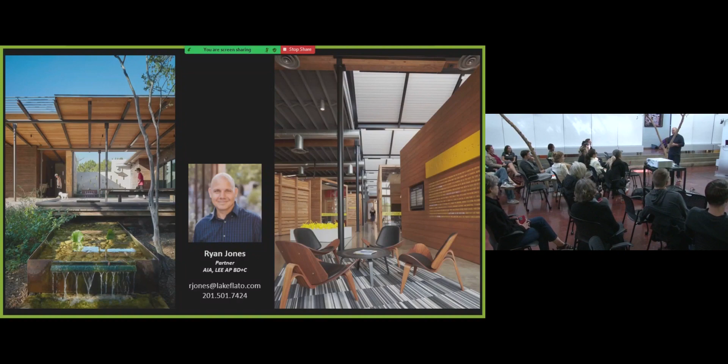Delight is a hard thing to design for, and most of the really great delight moments are actually accidents—they're not intentional. It's really difficult to design them because they're surprising, and architecture is very structured and methodical and has a lot of constraints. Unlike art, for instance, which doesn't have as many real restraints, it's hard to create delight, which is why it's usually accidental.

And you try to insert it as much as possible—you try to make space for delight, and you can kind of be intentional about it. But I don't know what else I could elaborate on in this time frame, so I'd stick to that for now. All right.

Ryan, one of the cool emergent qualities of your talk is that you've been talking about biophilia as you've danced with that tree there. I know, it needs a swing.